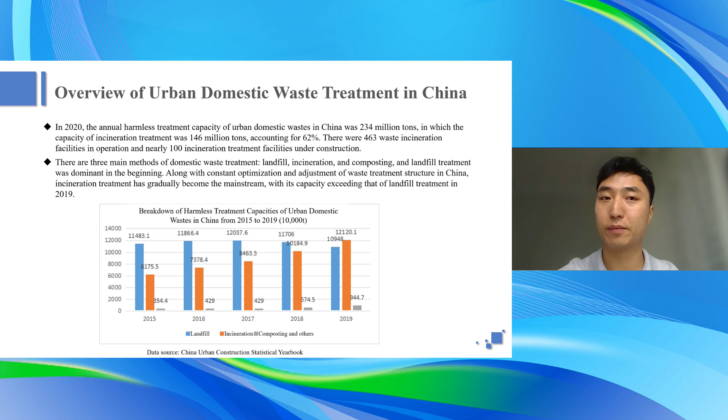So let's move over to another perspective, that is waste to energy. In 2020, the installed capacity had reached 15.33 million kilowatts. The annual on-grid electricity quantity exceeds 50 billion kilowatt hours.

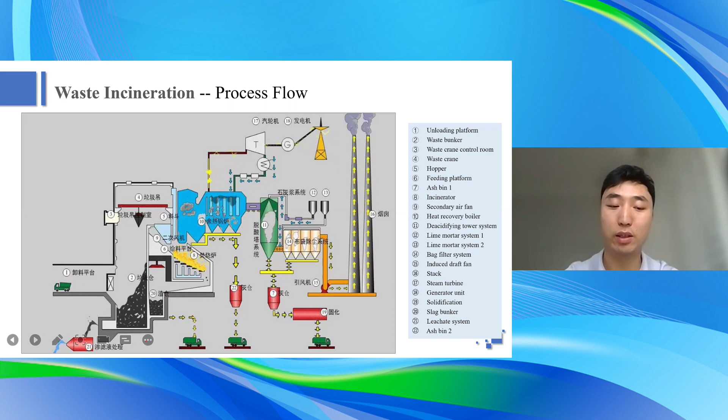The above mentioned are the introduction of the processes we have. Now we are going to move to key equipment of the incineration, covering the air distributor, the furnace separator, external heat exchanger, cooling chamber, low temperature superheater, air preheater, and also the flue gas treatment and water feeding system, deslagging system, etc.

What we want to focus on a lot is the furnace. There are 2 different schools of technology: the first is grate furnace, the other is FBP, fluidized bed. From the process, the grate furnace adopts movement of the grates, where waste is pushed downward through this movement. It passes through each area on the grates in succession until it is incinerated and discharged from the furnace.

FBP has been adopted for years. A large amount of quartz sand is added into the furnace, and hot air is blown in under the furnace to make the hot sand boil. Then the waste is fed into the boiling sand and burned with the hot sand.

The advantage of the grate furnace is that the technology is sophisticated with a small amount of fly ash, stable deslagging system, and simple control of combustion. The drawback is that it's more costly compared to FBP, with high maintenance cost and big volume. But now, with localization of this equipment, the price of the grate furnace has started to drop.

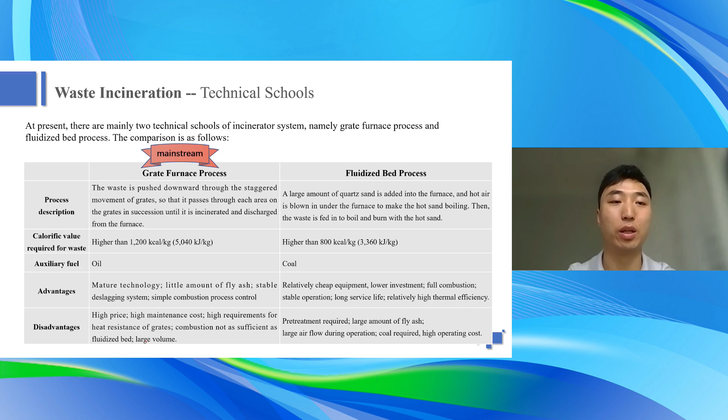The mainstream remains the grate furnace process, GFP, the absolute mainstream. In big, small, or medium-sized cities, we basically use the GFP, and the equipment is also becoming more and more localized.

And let's take Shanghai, the tier 1 city, as an example. There are 16 projects of incineration. All of them are based on the GFP, the Grate Furnace Process, 9 of which are imported. 7 out of 16 are domestically produced products.

Okay, let's move on to the investment cost and subsidies. In terms of the cost factors, investment in waste incineration is quite diversified, including the size of the investment, the land cost, the equipment, as well as the head counts, the human resources or labor cost.

For GFP, the investment cost per unit ranges from 0.3 to 1 million, while that of FBP is lower, 0.25 to 0.5 million RMB per ton. But as we mentioned, for example in Shanghai, the average investment of 16 projects is around 0.68 million RMB per ton.

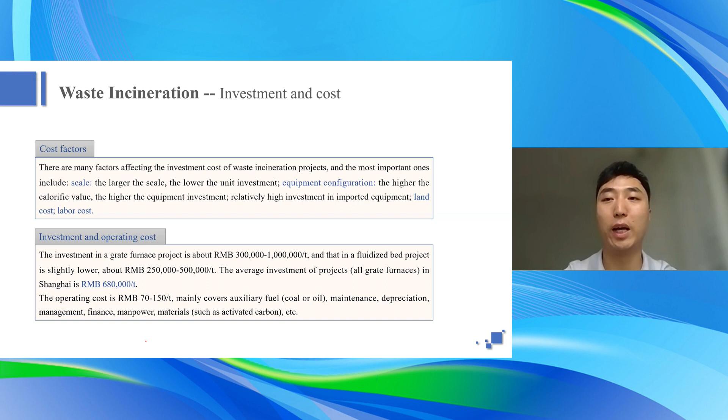The operating cost includes the auxiliary materials and maintenance, O&M, including human resources, labor, land cost. As we mentioned, it ranges from like 70 to even 150, but in Shanghai it's 50 to 90. The main source of income for incineration comes from the subsidy, as we mentioned. The other is the tariff.

The first is the waste treatment subsidy. It's closely related to the cost of incineration equipment adopted, as well as its boundary conditions. It varies quite a lot from project to project. Generally speaking, the subsidy may range from 30 RMB to even 200 RMB per ton. From the on-grid tariff, the tariff subsidy accounts for even 60 to 75% of the total income of the incineration project.

Yesterday, we mentioned a policy issued in 2012, a notice on improving the pricing policy for waste incineration power generation. It determines the waste to energy project using domestic waste as raw material. You need to remember the price was tentatively set at 280 kWh. The national unified benchmark is also 0.65 per kWh, not kWp.

In 2020, the subsidy policy was changed and clearly specified the condition for the so-called subsidy cutoff. The reasonable utilization across the life cycle is 82,500 hours or 15 years, and whichever is reached first will be adopted. Okay, the above is our overview on incineration. Now we need to move on to landfill.

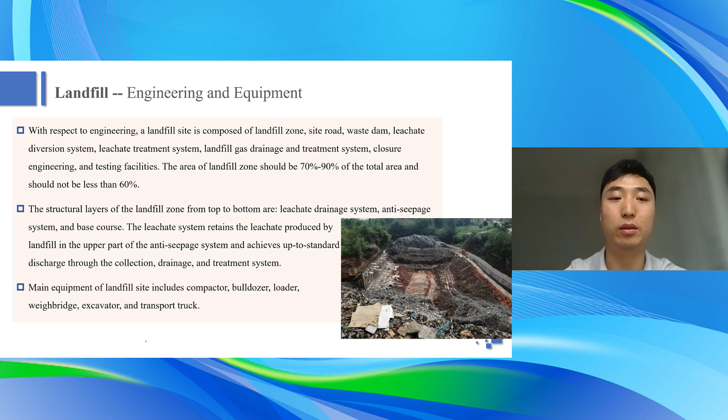From the project per se, it covers the area of the landfill. It covers the site, a waste dam, the leachate diversion system, treatment system, the gas drainage system, the closure engineering. It accounts for 70 to 90% of the total area. You can see the major system includes things like the compactor, bulldozer, loader, as well as other major equipment. And the leachate I just introduced is one of the major pollutants in landfill, and the seepage may cause great damage. Right now, we're using HDPE seepage control technology.

And now let's move to the third part, that is composting. First of all, what is composting? It is a technology that utilizes microbes to degrade or digest the organic matter in waste and therefore form a kind of substance similar to humus soil, which can be used as a fertilizer.

There are two ways: anaerobic composting and aerobic composting, with different kinds of bacteria or microbes used, for which you can see aerobic composting has been widely used due to its short period, high degree of harmless treatment, and good sanitary condition.

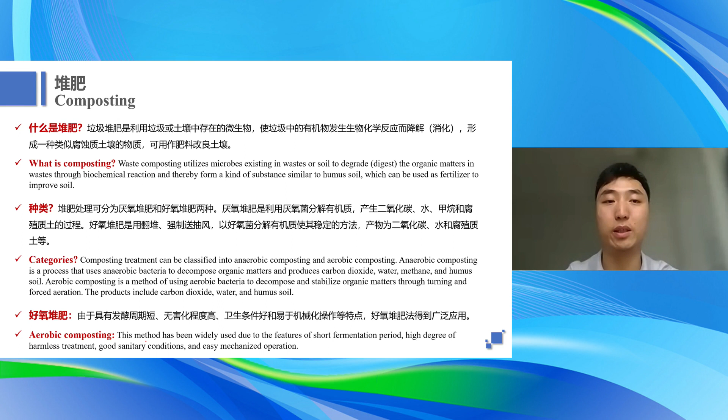And then let's move over to the anaerobic fermentation, also known as anaerobic digestion or biogas fermentation. It is a process where organic matters are catabolized by various microbes, and we can form combustible mixed gas such as methane, as well as the biogas slurry and residues. In recent years, with the advancement of waste classification, this has been extensively used in kitchen waste treatment.

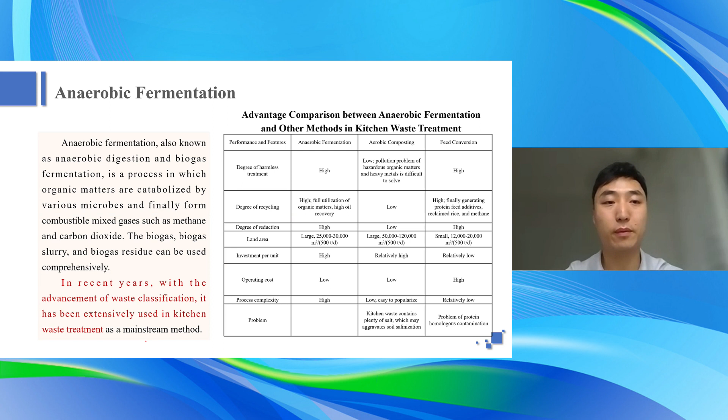So here is a comparison of various ways of treating kitchen waste, including the anaerobic fermentation, as well as the feed conversion. So the major two parts are anaerobic fermentation and aerobic composting, as feed conversion is rarely used. So you can see for the degree of harmless treatment, fermentation outperforms composting. For recycling, it is also high. For the land area, relatively similar. For investment per unit, you can see that the fermentation is higher than that of composting.

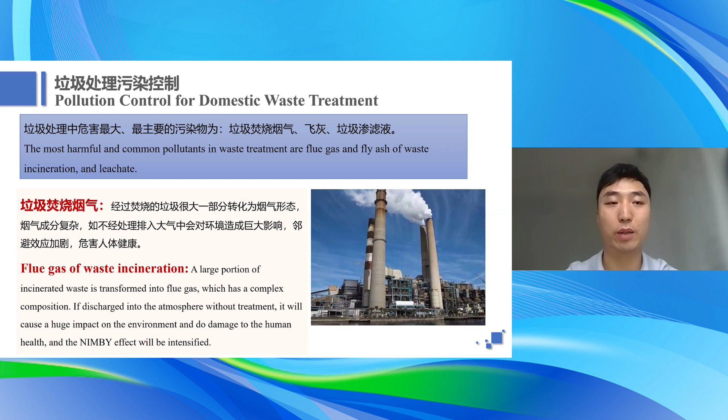And now let me move over to the pollutant control for domestic waste treatment. Here are the typical technologies and processes. As you know, the most harmful secondary pollutants are flue gas of waste incineration, as well as the leachate of landfill and the fly ash. So if you first check the flue gas, here are relevant pollutants, including the particulate matters, acid gases, organic chlorides, and heavy metals. These acidic gases are highly corrosive, and you know that the organic chlorides, like dioxins, are highly toxic chemicals, and heavy metal elements also directly harm human health. So you must purify this flue gas before you discharge it into the atmosphere.

As you can see, we have two parts, including the dust removal and the absorption purification. We have various processes like SCR denitrification, desulfurization, as well as activated carbon absorption, etc. So all of these are aimed to control these pollutants, and we can discharge while complying with all the standards. So I think this is a common concern for the public, dioxin. It is one of the key targets of policy measures. Yesterday, we talked about this standard several times: Standard for pollution control on the municipal solid waste incineration.

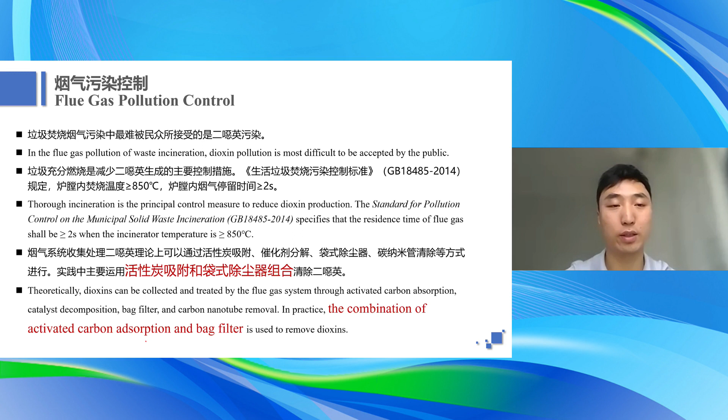You can see there is a very specific requirement of dioxin, and you can also see they have a particular requirement for the process that the incineration temperature should be higher than 850 degrees C, and the flue gas needs to stay more than 2 seconds. And that is the effective method to remove the dioxin in the flue gas. So yesterday we also mentioned the emission standards for different countries. You can see China is among the most stringent of all, 0.1.

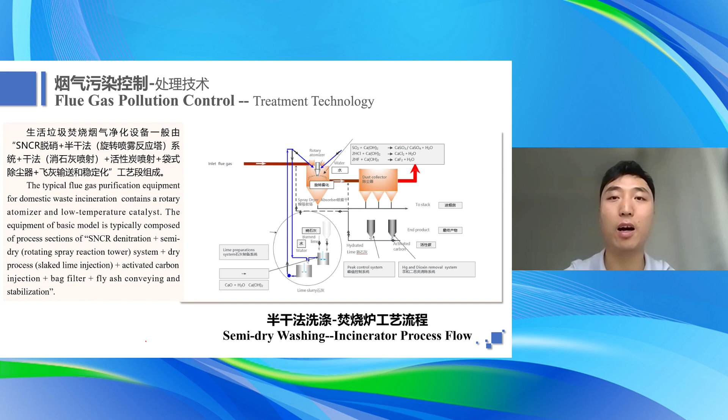And if you look at the technologies, let's take SNCR denitrification plus semi-dry plus dry process plus activated carbon and the bag filter. So this is just an example, and later we have suppliers who will give us a more detailed introduction of that. Other than the flue gas, we have the leachate as the other pollutant. For the leachate, it will be generated from incineration, landfill, as well as composting. It is also a complex pollutant with high concentration. Its major issue is the concentrated solution.

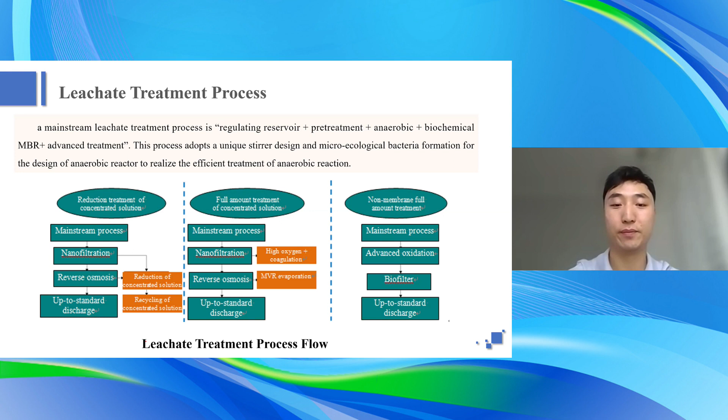Fly ash mainly comes from incinerators. It's also quite polluting. It has heavy metals as well as dioxin. The mainstream technology is solidification or stabilization, as well as cement kiln co-processing. So here I would like to give you a brief example of the leachate treatment process. This major technology includes regulating reservoir, pretreatment, anaerobic plus biochemical MBR plus advanced treatment. For the difficult part, we will have the anti-seepage as well as the MBR and others. So this will help us to do a simplified and comprehensive treatment. And for the details, I do believe the following suppliers will give you greater detail.

So that was my part on all these technologies of urban waste management. I covered many different technologies and processes, and due to limit of time, I was quite brief and concise. The details can be shared by the later suppliers. The four of them are leaders in the industry for urban waste management, and they will share with us their respective perspectives on flue gas, leachate, incineration, as well as fermentation.

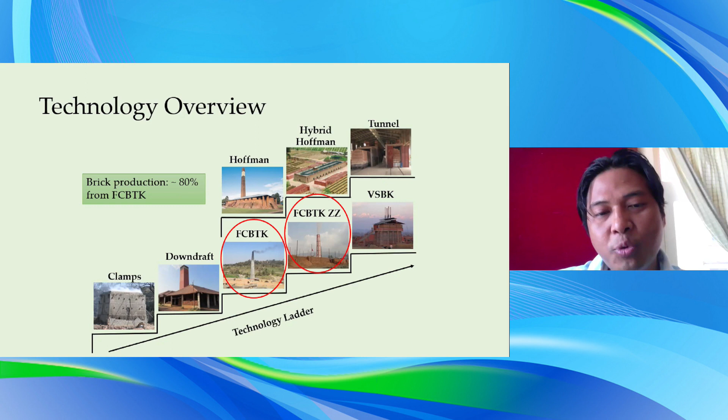In proportion, more than 80% of the kilns are FCBTK now. Another is the zigzag, FCBTK zigzag, about 10 to 15%. The rest are other kilns like VSBK, tunnel kilns, hybrid Hoffman kilns, clamp kilns. So today my presentation is more focused on FCBTK and zigzag, and what improvements we did in FCBTK zigzag.

In the context of Nepal, the mainstream technologies are FCBTK and zigzag. So what is the difference between FCBTK and zigzag? The basic, salient difference that a visitor who goes to the kiln sees is the structure of the FCBTK and zigzag kilns. In FCBTK, the kiln is a fixed chimney bull trench kiln.

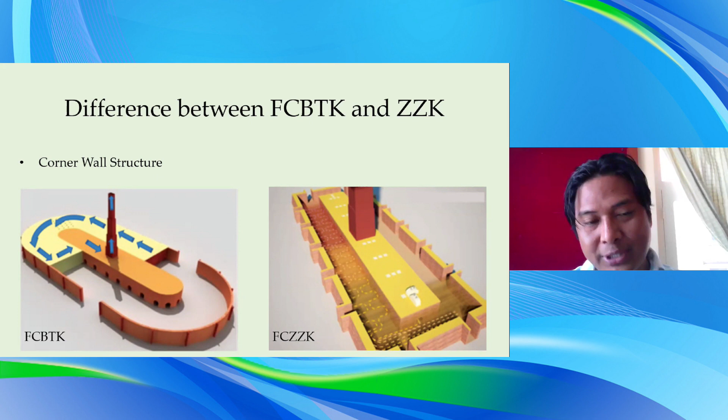It's the oval shape. The ends are oval shaped, whereas in FCBTK zigzag, you can see the ends of the kiln are square. So that is the basic difference which we can observe from outside. The other difference is the stacking pattern. You see the FCBTK straight line. We say it's straight line and zigzag.

The straight line is nothing but the stacking pattern of the green bricks. If you see in the slide on the left side, that's FCBTK. The stacking pattern is a very straight line, so the fire moves in a straight path. Whereas in the zigzag, the straight line is covered with the wall. That means when the fire moves in the straight line and the wall comes in between, the fire is diverted in a zigzag path. So that's why we call it zigzag kiln.

You can see clearly here is the fire movement. On the left side, it's FCBTK, which is a straight line. You see the fire movement is very straight. Whereas in the other there are lots of walls, we can say baffle walls, created in the stacking pattern itself, in the green brick itself, so that when the fire flows, it will collide with the wall and take the zigzag pattern. So that's why we call it that.

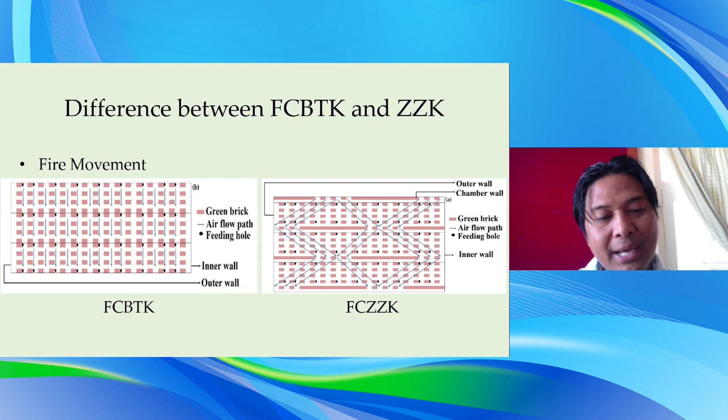So you can see that the length of the fire is quite less in FCBTK straight line, whereas in zigzag the length of the same fire becomes longer because of the created zigzag pattern. That is the salient difference of FCBTK and zigzag kiln. Another is the firing zone. In the operation, in straight line we have 2 or 3 fire feed hole lines only, whereas in the zigzag kiln we have at least 10 feed hole lines, more than 10, 12, 14. Whereas in the FCBTK, it's 2 or 3.

Another difference is the firing practice. In FCBTK, the feeding is intermittent. That means one fireman keeps on feeding for nearly 10-15 minutes, and then he takes a rest for 30 minutes. But in zigzag, it's continuous feeding. One person keeps on feeding in a continuous process. In FCBTK, it's double or even 3 men feeding at one time and taking rest for half an hour, whereas in FCBTK zigzag, one single person keeps on feeding continuously.

In FCBTK, they use big spoons to feed, so they accumulate lots of coal or fuel in the feed holes. Whereas in FCBTK zigzag, they have small feeding spoons, so a calculated small quantity of fuel in continuous feeding. They follow this pattern in zigzag, which makes it more fuel efficient and environmentally friendly. So those are the differences; then what are the similarities in FCBTK and zigzag?

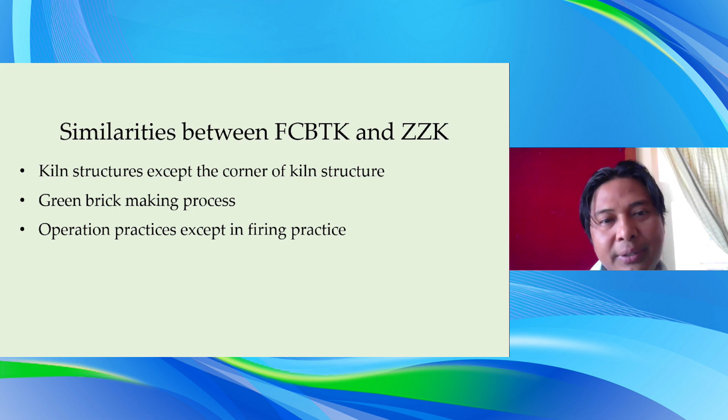Another context in Nepal is we had a huge earthquake in 2015, and we could see the damage at that time. We had about 900 to 1,000 brick kilns, and 350 kilns were damaged because of that big earthquake. We have 108 kilns in Kathmandu Valley; out of 108, 105 kilns were damaged. The estimated loss was 1.12 billion Nepali rupees, and the production loss was more than 40% due to this earthquake.

So what we decided is to have a kind of right design, which is earthquake resistant, which is energy efficient and lower emitting for the new building of the kiln itself. So we just started working with the team of engineers, brick entrepreneurs and the practitioners, so that we can collect all the information, all the data to improve the zigzag kiln itself, to improve the fixed chimney into zigzag.

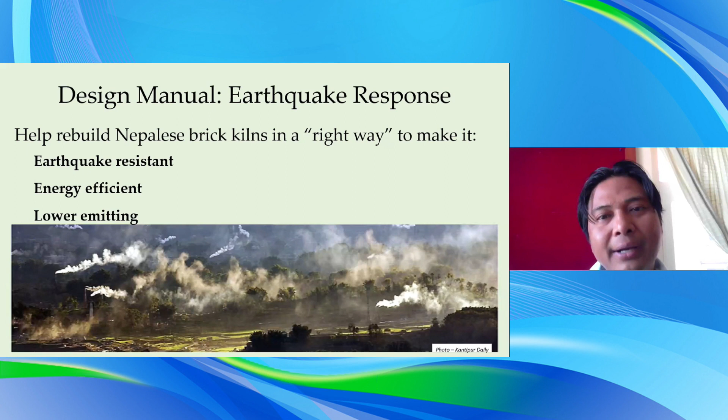So what are the improvements that we did? These are the improvements that we can see. We designed a new kiln chimney. We designed the outer wall. We calculated the heat loss from the wall, outer wall, wicket gate. That is the gate which is used to take in or out the green bricks and fired bricks. We also designed the flue duct, the size of the ducts, inlets and outlets. Everything we designed in a proper way.

So these are some pictures of the improvement that we did. The salient improvement is in the chimney. The chimney is newly built, newly designed, because beforehand there were big, huge chimneys for the FCBTK. It was about 110 feet or 130 feet, above 100 feet. It was huge and bulky, without any lateral structural element to withstand the lateral load due to the earthquake. So what we did is an RC, reinforced concrete frame chimney, or the metal chimney.

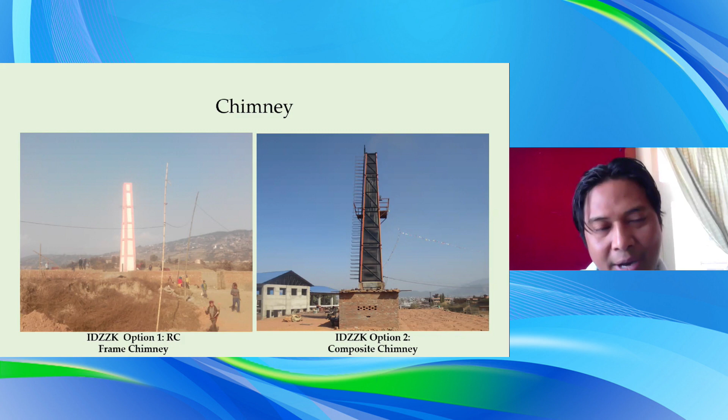We replaced all the chimneys with RC, or we give options, so that even if there is another earthquake, the damage due to the chimney will be less. We give three options. One is RC, a completely reinforced concrete chimney, or the iron frame chimney, or for someone using natural draft, who needs a very long chimney, more than 100 feet, they can also go for that one, but with the RC, earthquake resistant design. So this is a salient change in the design improvement.

And another change is in the wall itself. Initially, it was a very slim wall structure, about 18 inches or 2 feet. But we changed the new design to a very heavy and bulky wall with a cavity inside. It considered seismic loads, the lateral load, air leakage control, heat loss control. It controls the heat loss, it controls the leakage from inside or outside, and it is also earthquake safe. So that is another big change that we did in the improved kiln.

Other changes are the proper sizing and spacing of the flue inlets and outlets, and also the use of concrete pipe, concrete hume pipe as we say here in Nepal. We use the concrete pipe in the inlet and outlet of the kiln itself, which is very energy efficient, very fast to construct, and very easy to maintain.

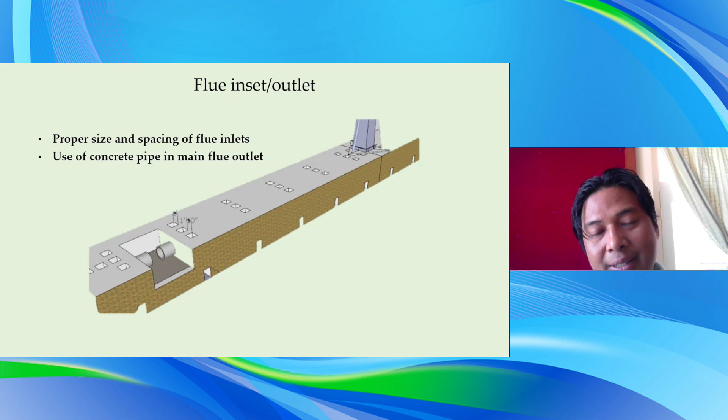We did the proper calculation of the flow of the flue gas, the quantity of the flue gas, then the velocity of the flue gas, so that we designed the appropriate sizing of the flue inlet pipes. And this is another change that we did in the kiln floor. Initially they had only a very thin flooring system, which had a huge amount of losses from the floor.

So what we did is we put about 1 foot thick sand on the floor, with aluminium foil at the center of the sand. And additionally we put brick soling layers, brick on flat and brick on edge on top. So the thickness of the soling is quite high, which reduces the heat loss to the ground. That is another change that we did in the improved kiln.

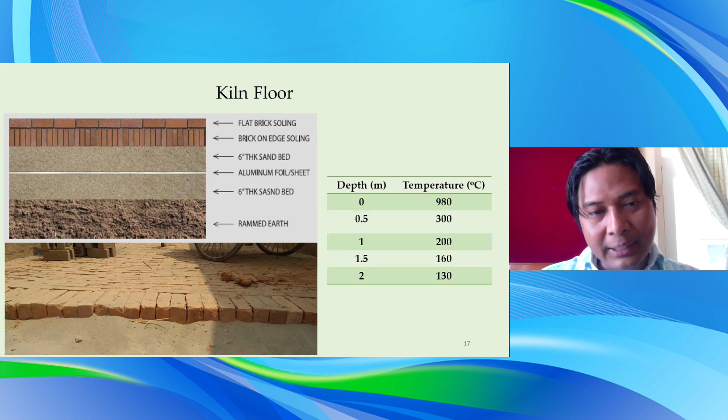Another design that we made is in the fan system. Initially, it was natural draft. Then when we went to induced draft or forced draft, we designed a proper mechanically engineered fan system, calculating all the required quantity of flue gas to be passed through the chimney.

We also introduced the VFD, variable frequency drive system, in the fan, so that if we need a higher RPM, revolutions per minute, we can increase it as per our need. So that is another change that we made after the big earthquake. And another improvement in the operation practice is using a higher amount of insulation at the top of the kiln.

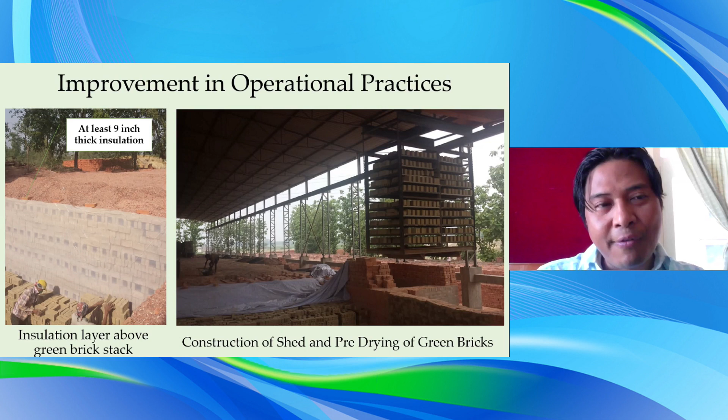Another improvement we recommend is to use shed and pre-dry green brick. That is the improvement in the practices. Beforehand, it was improvement only in the structures. Now it's improvement in the practice.

We also maintain the flue gas within 80 to 120 degrees Celsius. This improvement in firing practice gives us the maximum efficiency of the kiln. If the temperature is above 120 degrees, the hot gas which can be used to dry out the green bricks in the preheating zone is passed out instead. If it is below 80 degrees, the tendency of water vapor accumulation inside becomes high. So the most efficient design and operation is if the flue gas is maintained within 80 to 120 degrees.

So we did that, and we tried to maintain this temperature throughout the firing.

Another change we made is in the wicket gate, what we call Dwari, the opening where we take in the green brick or take out the fired brick. A huge quantity of loss comes from here too, because it's an open system. During firing, if it's not properly built, the leakage from this part is very heavy. With only an 18-inch thick wall, which is general practice in Nepal, the air leakage is 57% from that wall. Whereas with an improved wicket gate of 5 feet wall thickness, we can reduce air leakage to only 17%. That is one kind of improvement we made.

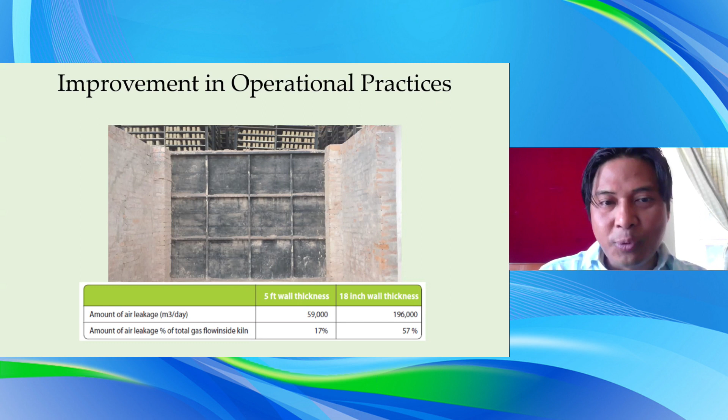So what are the benefits of the improvement? The first benefit is that the kiln structure is structurally safe and earthquake resistant. Since Nepal is very prone to earthquakes, with the tendency of a big earthquake in the future, and the kiln itself is very bulky with huge chimney, huge walls, huge structure, if it's not earthquake safe there are huge risks of human casualties if a similar earthquake happens in Nepal. The new improved design is earthquake resistant and structurally safe — the chimney, the walls, the internal walls, the systems are all safe. Structural safety is quite high in the new design.

Another benefit is energy efficiency. Since we're able to control lots of air leakage from this improved kiln, the efficiency is quite high — we experience about 30 to 40% fuel savings because of this improved zigzag kiln. Another salient benefit is environmental performance, which is quite good in the new improved design, including PM 2.5 emission reduction.

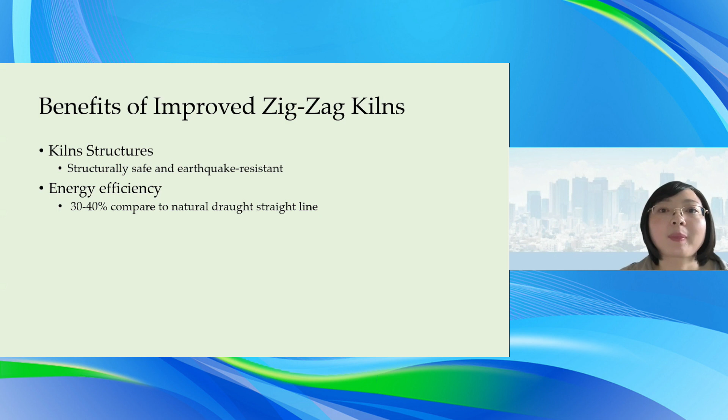Okay, can you see? Yes. Okay, so I was talking about the benefit of the zigzag kiln. The first benefit is the structurally safe and earthquake resistant design itself, which is very important in the context of Nepal, where there are lots of earthquakes going on. It's a very earthquake prone zone in South Asia. Another benefit is energy efficiency itself. We have 30 to 40% of energy fuel saving in the improved design. Another salient improvement...

Hi, Sanu. I think we are losing Sanu again.

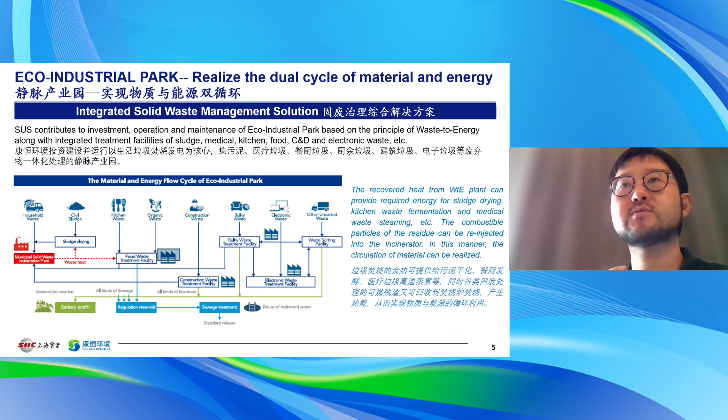And in terms of scale, most of the projects are pretty large. We had an internal calculation that the average capacity of our invested facilities is around 1,600 tons per day, which means most of the projects are big projects. Big projects will differ not only in technology, but also in business models and investment conditions.

But nowadays we are also starting to do some smaller projects, between 500 tons to 1,000 tons, because I think in most developing countries the scale per project would be around this size, as there are not many big cities in other developing countries.

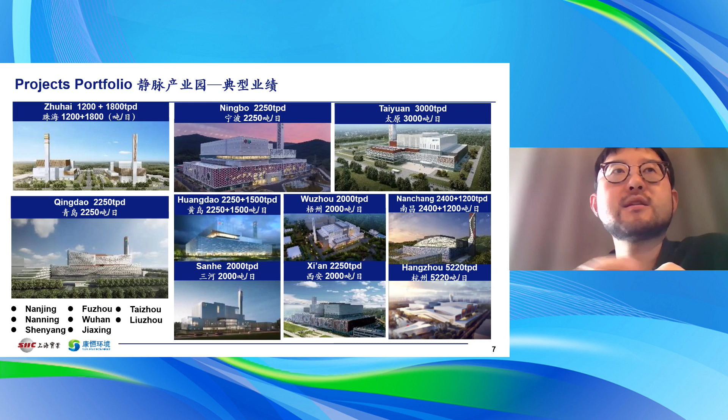But actually, we have most of our experience on huge projects. This is one typical case we invested in, in Ningbo City, close to Shanghai, which is also an eco-industrial park.

For the waste-to-energy facility itself, there are several important points I need to raise. This is the very first facility in China where we introduced the ultra-low emission flue gas treatment process technology, including SNCR, SCR, wet method, GGH, and some traditional methods, in order to achieve ultra-low flue gas emissions.

Besides the flue gas treatment technology, this is also the very first facility in China introducing industrialization of the architectural design. You can see from the picture that the Ningbo facility is pretty beautiful, with a honeycomb concept incorporated into the facility.

And of course, this is the first one which we are working with a French architecture firm, AIA, to develop this, to generate this idea. But the purpose, I think, is not only to make it beautiful. I think around 2014, 2016, the awareness of environmental protection became stronger and stronger in China.

So we also have encountered the NIMBY, not in my backyard, phenomenon. So how to deal with this properly is the key to helping this industry to grow in China. So what we think is how we can make a facility or an industrial park more eco-friendly and more adopted by the local community, and how to interact with the local community. That is the key of everything when we started to design.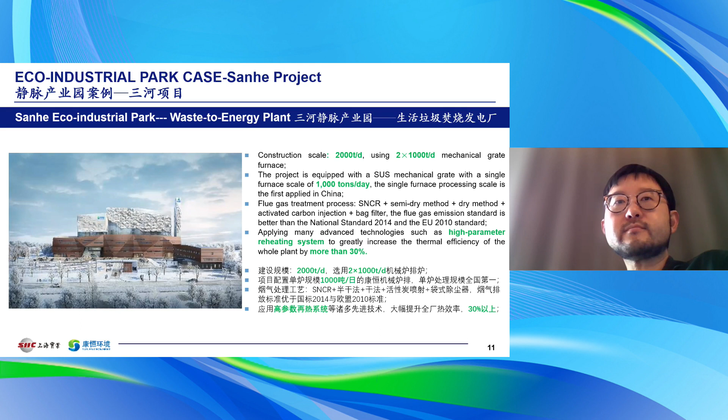Another technology, for instance, is in this facility, which was put into operation a year ago, our facility close to Beijing. This is the very first project in China to introduce the high parameter reheating system into a waste-to-energy project, which means these projects have a much higher thermal efficiency. Normally most waste-to-energy projects in China have an efficiency around 22, 23%, but this project has exceeded 30%. So it's a pretty good performance on efficiency utilization. And this is our facility in Nanchang in Jiangxi province.

Besides the projects we have invested in, I also want to add some points on our technology and engineering. As I have introduced, we started with the grate technology and incineration lines. So we have put a large R&D team on the development of technology for the combustion, the ACC system, and some related technologies to make the combustion more thorough and more efficient. But besides, we have also developed some side technologies like flue gas cleaning, leachate treatment, and also fly ash stabilization equipment and technology, and the materials as well.

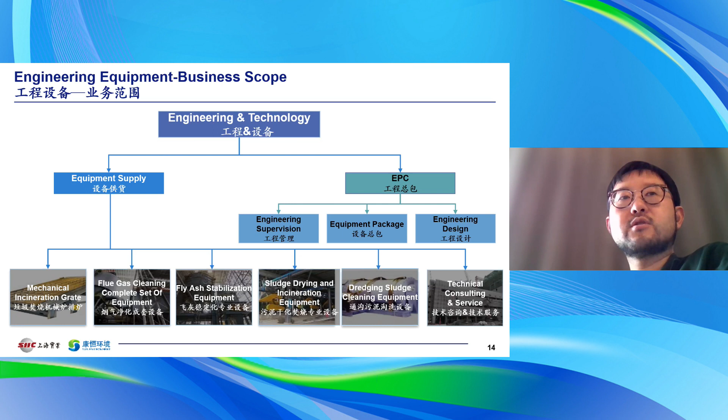We got some major progress and some prizes, and even some new, edgy technologies are under development. This is our grate, which is pretty much the same as Hitachi Zosen's technology, as we have the same source of the technology. These are the manufacturing bases we have in Jiangsu province and in Shanghai. And as I mentioned, we are also still an independent equipment provider in the industry. So far we are supplying more than 246 facilities in China with around 500 incineration lines. And we have highlighted some typical projects in very different environmental conditions.

Because China is pretty big geographically, we have some projects in very northern areas like Harbin. They have a very, very cold natural environment. So how we protect the temperature and keep the facility warm to make the waste burnable is the key of the technology. And on the opposite, we have a project in Sanya on Hainan Island. It's very humid, beside a seashore, so we have to face the high temperature and also humidity and the corrosion issues.

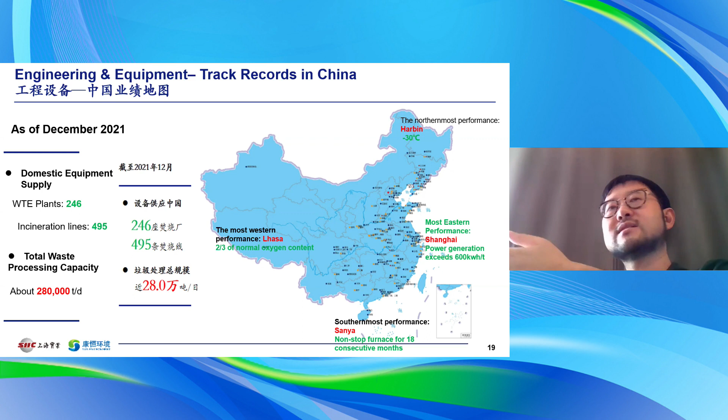And for instance, we have a project in Lhasa at high altitude, which I think is one of the highest projects in the world, which only has 2/3 of the normal oxygen density, so that is also another challenge. So what we have done is we have supplied projects to so many different conditions, which gives us a lot of track records and experience gained from those projects on how to deliver a technology to a very different environment.

Also, we have some other models, like O&M, where we operate and maintain the projects for other investors, because not all investors are technology experienced, so they need some help. So this is another business we are involved in.

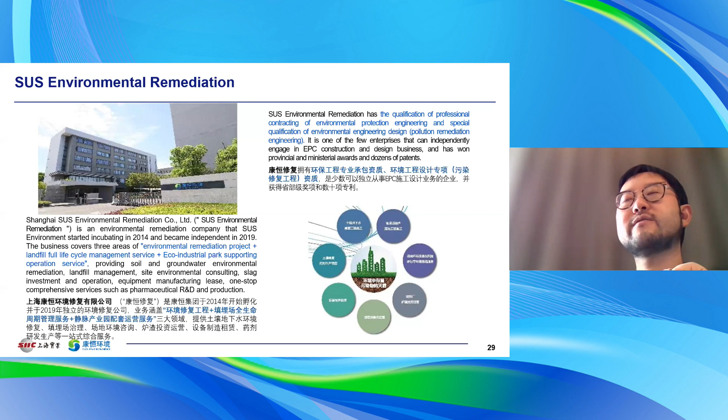Last but not least is a little introduction to our remediation business. This is the part which works alongside our waste-to-energy facilities. Right now, we are operating some landfills, which treat the bottom ash and fly ash, and we are also doing landfill remediation. It's mostly in China, but we got our very first project in Macau last year. Yeah, this is the brief introduction to SUS, and I think it's precisely 20 minutes.

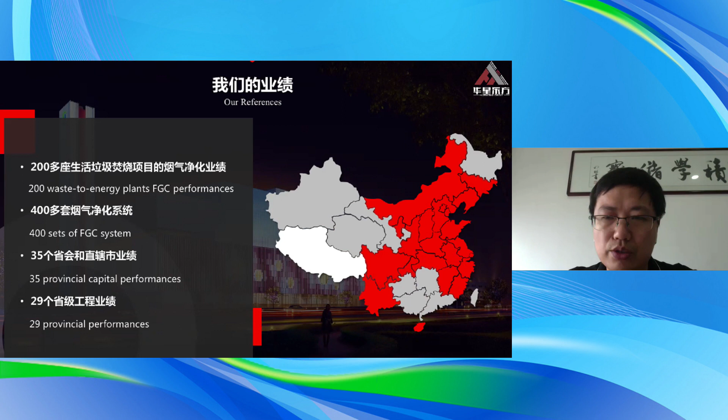So here you can see a simplified process flow for the streamlined flue gas cleaning. You can see the flue gas entered from the heat recovery furnace, and it will go to a rotary atomizer, in which we will remove the SOx, the acidification with the reaction, and then it will go to the dust collector. Prior to that, we will have a spray dryer injection, including lime and carbon, that will remove mercury and dioxin and other toxic chemicals.

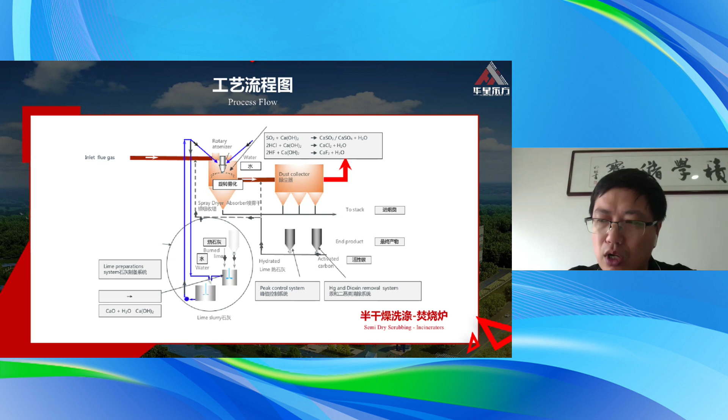After that, we can meet the emission standard of EU 2010 and China's national GB standard 2014.

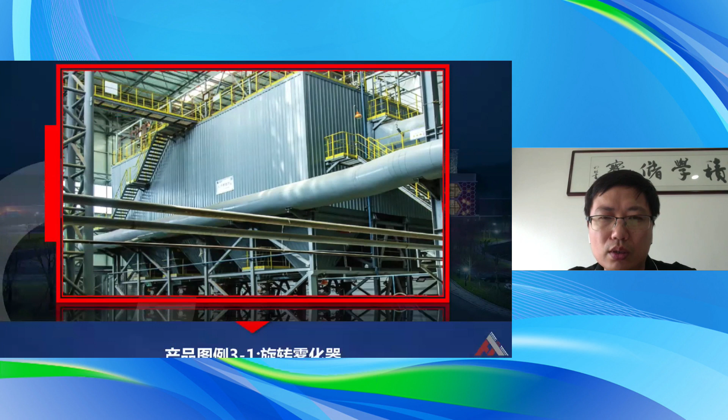This is the second product example, bag filter for the semi-dry reaction. So this is the container, the outside shell, and inside this container there will be several bags that will act as filters. And the third product here is the Rotary Atomizer.

We talk about the NOx. They have SNCR and SCR. SNCR is to inject ammonia solution or urea into the furnace, and that is how you remove the nitrogen in there. But for low temperature catalyst, you will be able to remove the NOx without the ammonia with a low temperature catalyst.

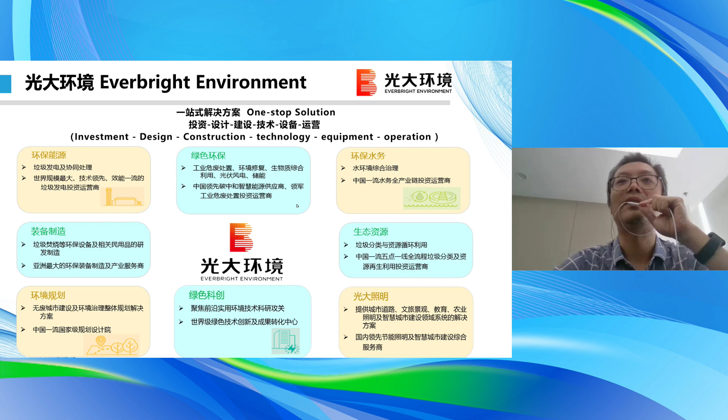Number 8 is our lighting business, Everbright Lighting. It targets the smart city, including street lighting, sightseeing lighting, and energy saving like LED. So all in all, we offer the one-stop solution, for incineration, biomass, hydro and wastewater sewage treatment. We cover from investment, as early as proposal design, construction, tech support, including the O&M after the project is finished.

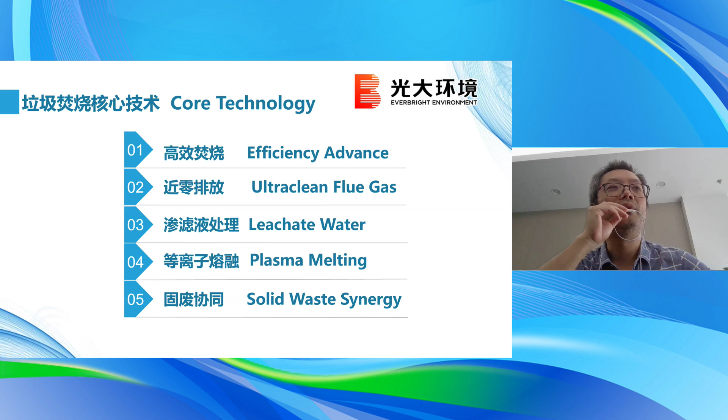And for that process, what are the challenges? The first is the thermal energy utilization rate is too low. For the traditional incineration facilities, the thermal efficiency is less than 22%. What it can realize in terms of the parameters on environmental protection is not that good. It may reach the EU 2010 standards, but as the standards trend more and more stringent, it may struggle to satisfy the requirements in the future.

So we have core technologies as follows. The first one is to improve the efficiency. The overall methodology is that we want to raise the steam parameters of the boiler. If it is middle temperature, middle pressure, the thermal efficiency is just 22% or less. In 2013 and 2015, we kept middle temperature but increased to sub-high pressure. So we reached a thermal efficiency of 25% with sub-high pressure.

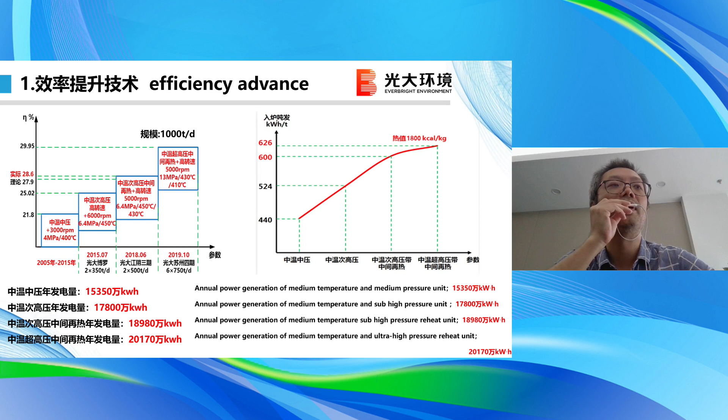And that is why we developed this ultra clean technology, or almost zero emission. After we go through the conventional flue gas cleaning, we have some extra devices. With this low temperature SCR catalyst, we can greatly reduce the NOx. With this wet reactor, we can also remove the acid gas in the flue gas. And with this combination of wet plus dry methods, we can also control the particles very well.

So we did a comparison with this ultra clean technology, again taking a 1,000-ton scale incinerator. Its heat value is 1,800 kcal/kg. And you can see, compared to conventional incinerators, emission reduction can be 7.6 tons of HCl per year, SOx 60.8 tons, NOx 228 tons per year. So you can see this is a great improvement for the emission.

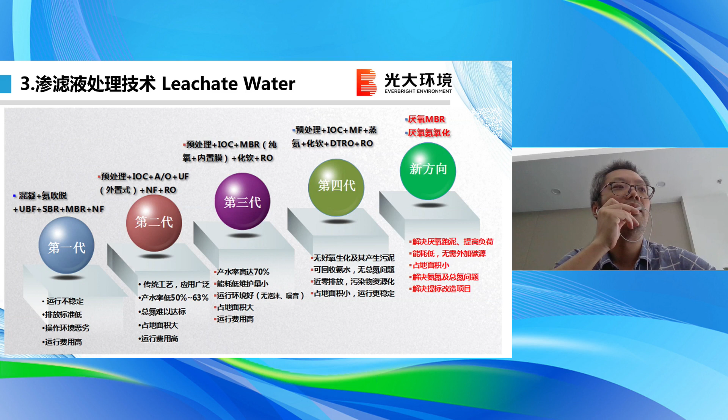Next slide, you can see the comparison of these 4 generations of technology. With the improvement of our technology, we have further reduced emission and have higher water recovery. Now at generation 4.0, we can have 85% of that. You can see the quality of the water has been improved, and we reduced the land coverage to a greater extent.

This slide shows our zero-emission whole recycling liquid treatment process. 85% of them can be reused in the cooling tower. For the concentrated solution, it will go to areas where they do not have very demanding water quality requirements.

So you can see the leachate first goes into the adjustment pool and goes to the anaerobic tank. This is our self-developed IOC tank. From that, it will go into the AO pond, and then it will be in the tank for softening.

With specific chemicals, we can soften the ions, and then it will go into filtration to remove all these ions, and then it will go to RO, reverse osmosis, and then DTRO for reconcentration, and eventually 85% of the water can be reused for cooling.

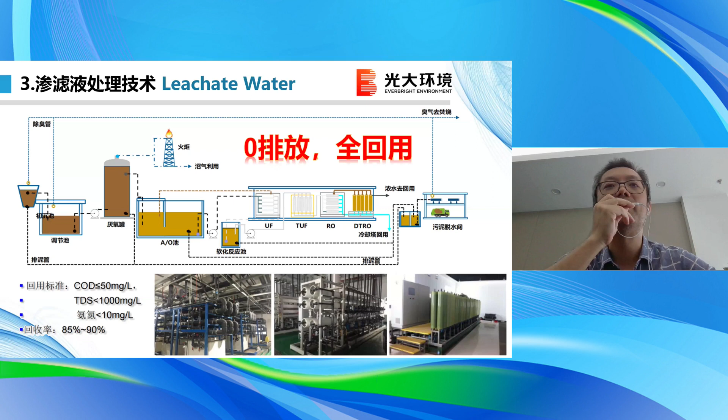Next slide. The next technology is plasma melting. We know that plasma is a kind of ionized charged gas, which is considered the 4th state of matter, and it has conductivity. It exists at very high temperature, 3,000 to 5,000 degrees C, and then the gas will be ionized.

With this technology, we aim to deal with 2 things. One is fly ash, the other is hazardous waste. The reason why we have the plasma technology for fly ash is that currently in China, the fly ash can go to landfill.

So we have similar consideration for plasma melting for hazardous waste. For the conventional way of dealing with hazardous waste, you will end up with certain slags that will be landfilled as hazardous waste. Is it possible for us to have a solution that solves the problem once and for all without further need of landfill?

Next one is for the solid waste synergy. The reason why we have such a technology is for every city, as long as there is need for dealing with household waste, there will be some other waste, including sludge, kitchen waste, and healthcare waste, etc.

So in the old days, we also had various organic waste disposal facilities, but in the end, we found from the technology perspective they were pretty mature, yet had limited capacity. The reason is when you build them independently, they have very high cost and a single source of income. For the government, it would be a great fiscal burden. For smaller scale separated organic waste disposal facilities, for a long time they existed in an awkward state - the technology is available, but the market is not yet ready.

So starting from 2016, we had the idea that maybe there's a way to reduce the cost. And we see the reason why these technologies or these small-scale projects are costly - that is because they need energy and resources, including steam and electricity, and that is very costly, and that drives up its OPEX.

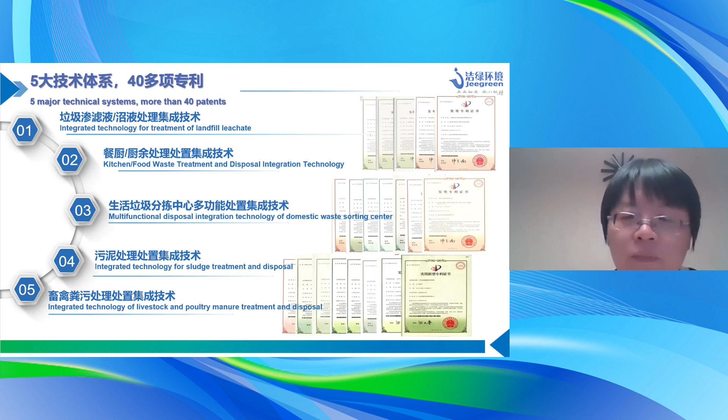I'm going to demonstrate our technology and products. We have forged 5 key technical know-hows, including integrated technologies, especially leachate evaporation and advanced oxidization technologies. We also have technologies listed for kitchen food waste treatment, disposal integration, and multifunctional ones. Thanks to the time limitation, I have to go very quickly.

The first is about leachate. For leachate and biogas slurry discharge, the pains in the industry are complicated composition, very high organic matter and ammonia nitrogen. Water quality and quantity may have fluctuations, making it difficult to treat. The concentrated solution produced by membrane treatment is difficult to further treat.

That's why we mention, in terms of core technology, CSTR, the anaerobic treatment. We work with Schumann, a German player, and Mixel from France. These international counterparts help us optimize our design of the anaerobic tank and agitator. We have addressed the floating slurry, etc. And the microbiological theory has been applied to the whole process of anaerobic fermentation to increase its efficiency and improve the COD removal rate. Effluent COD is 8,000 mg per liter, and the biogas production is 0.4 to 0.5 cubic meters per kg.

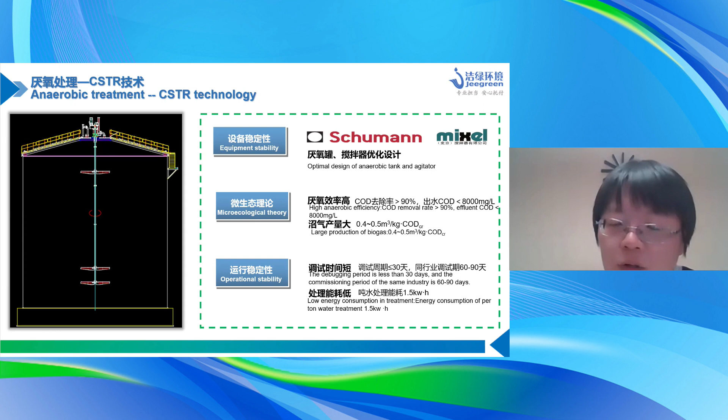Our O&M has been very reliable. We reduce the time of debugging, usually less than 30 days, below the industrial average. The energy consumption can be lowered to 1.5 kilowatt-hours per ton.

When we're talking about the treatment, the regulating tank, pre-treatment, anaerobic, and biochemical MBR is the master process. We have more stringent standards on emission, so you may need membrane evaporation. It can satisfy most emission standards, but relatively speaking, for landfill requirements, what we can do is as follows: we can use the main process, Fenton oxidization, BAF, and biofilter to reach emission standards. The Fenton oxidization makes sure the emission of the concentrated wastewater meets standards.

Now we have the pollution control standards for municipal solid waste landfills: pre-treatment plus MBR, advanced oxidization plus biological aeration filter. And for Class A standards for sewage, we can also have the relevant system.

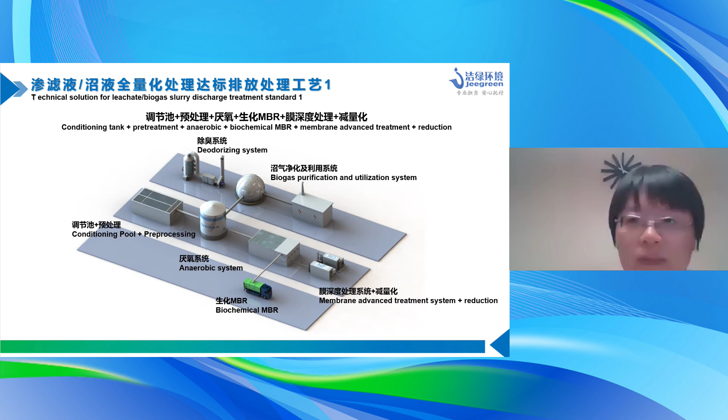This is the 3D model. So we have a conditioning tank for pre-treatment, the anaerobic and biochemical MBR looks like this. This is for the non-membrane ones, advanced oxidization, and also the biofilter, and also for sludge. And this is the total treatment, the reverse osmosis concentrate for evaporation, MVR evaporation unit in the middle. This technology is the mechanical vapor recompression.

Which is also boasted by Jeegreen with our own IPRs, intellectual property.

So for the efficient pre-treatment unit, we already have done a very important job, and we will have the desalination unit after that. So our efficiency of MBR is very high. The cleaning cycle has been extended from 7 days, which is the industry average, now to 60 days, which is 2 months. And the sludge can be used also for landfill or reuse or incineration.

That was in Shougang, that's Beijing Steel, 900 tons per day. We use the mesophilic anaerobic and MBR, NF plus RO. It was put in place in 2013, awarded as the national level demonstration project on energy consumption.

And these are some other typical cases. On the right side is also in Beijing, Fengtai: 1,200 cubic meters plus 250 concentrated liquid. You can see the ratio of concentrated liquid is 20 to 30% of the leachate. We believe anaerobic NF, RO, combined with other technologies will also be on our radar for further improvement.

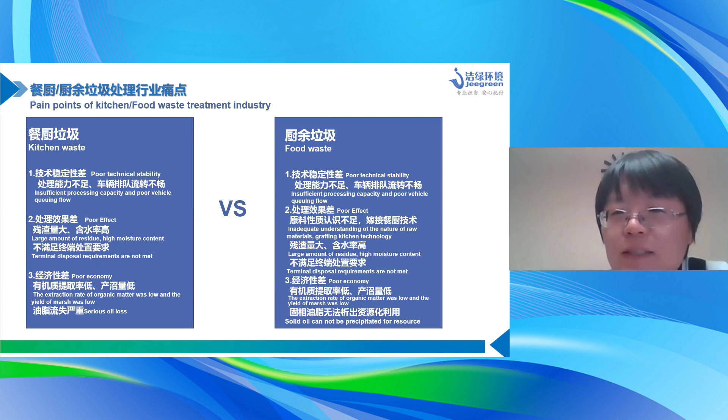And for the food waste on the right side, you can learn from the kitchen waste treatment, so there are many references we can take. Some of the pains, open questions on food waste pop up again.

So for these kinds of pains in the industry, we propose our own design concept. For kitchen waste, this is as follows: starting from pulping and then separation. For the pulping equipment, as shown here, we take some reference from the pulp, paper pulp, with secondary development, and we have the receiving hopper, the hydrocyclone pulping, screw extrusion, and collection at the broken bed, rubbing, washing, and separation.

So you can understand it is something similar to a washing machine. So we can separate the organic matters to better extract these matters for anaerobic fermentation. So this is our module. You can see there's a receiving unit. It goes to the hydrocyclone pulping unit, and then three-phase oil extraction to remove the oil and the slurry, and then the high concentration organic solution will go into the anaerobic unit.

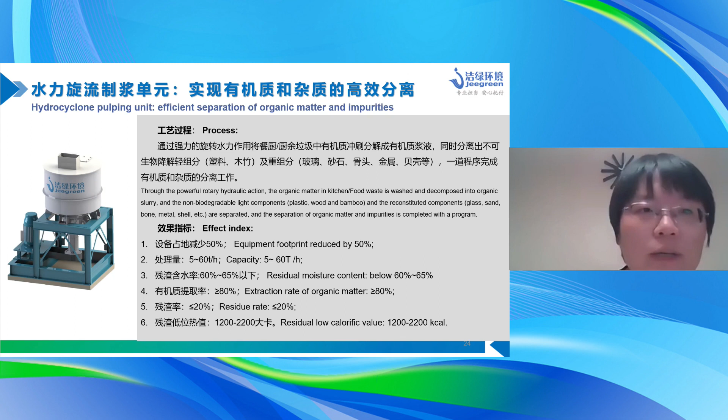For the biogas slurry treatment, it's similar to the leachate treatment as I previously described. So this is a hydrocyclone pulping unit. It can be flexible in its scale. It can deal with 5 to 60 tons per hour. The extraction rate of organic matter can be higher than 80%. Residual rate is less than 20%, and the calorific value is around 1200 kcal.

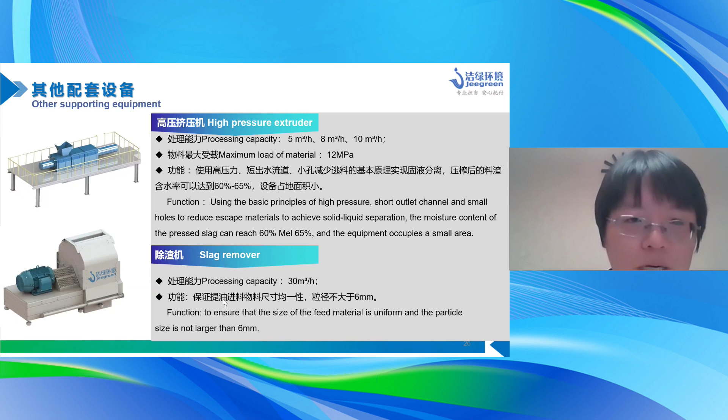This is a three-phase oil extraction, so it can have the sand removal, heating, and surface separation, and the efficiency of oil separation can be 97%. Here list the other supporting equipment: high pressure extruder to remove the moisture, and slag remover to ensure the size of the feed material is uniform.

After redesigning this kitchen waste technology, we can shorten the process chain by 50% and the queuing time by 70%. There's high purity in slurry and few inert substances, so biogas output can be 80 to 90 cubic meters per ton of waste and less than 10% of the residue. The moisture content is less than 65%. The oil per ton extraction has been improved by 2%.

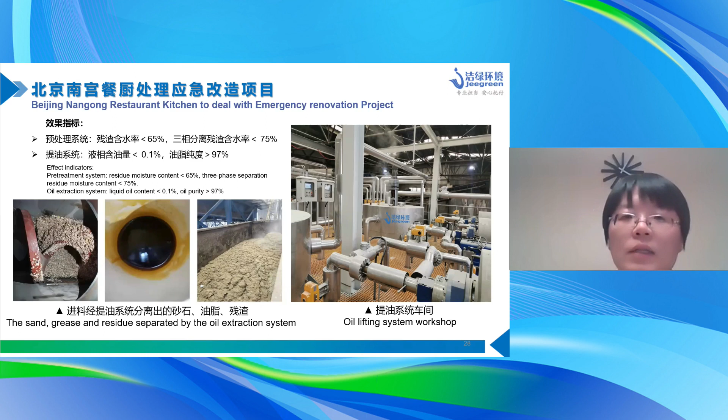So with this technology, we can have an in-depth analysis and come up with a design concept. We need to change the raw material into mature material, so it should be ripened before pulping. So it's like a thermal hydrolysis with high temperature and pressure, and then with hydrocyclone pulping, we can have constant concentration of organic matter. So this is our process.

Starting from receiving the feed, it will go to the thermal hydrolysis to extract the organic matters, and then it will go to the pulping after the thermal hydrolysis to remove the oil and the impurities, and then the rest go into the biogas unit, and there will be other purification and deodor units. So this is our independent technology with patent. This one is for thermal hydrolysis. With 100 to 150 degrees of steam, there can be rapid ripening.

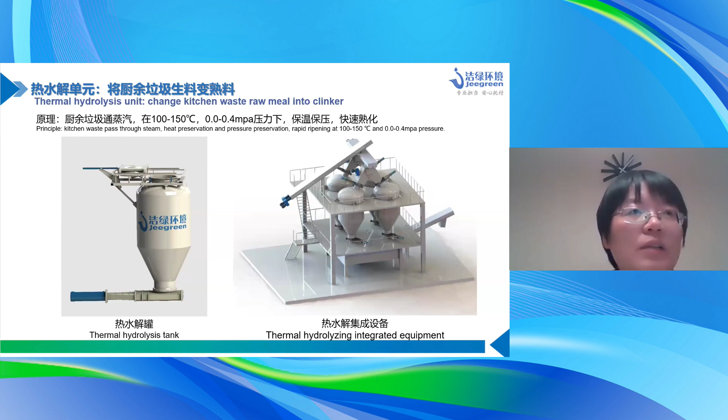It's quite similar to kitchen waste. With the thermal hydrolysis, we can have greater adaptability to the waste, and we're not picky with the raw material. As you can see from the previous ones, we do not need complicated pre-treatment, and we can have stable operation. We can shorten the process chain by 1/3, with much less residual content, less than 20%. And there is a high extraction rate of organic matter and yield of biogas.

With this thermal hydrolysis technology, we can very effectively remove all the organic matter. We break the cell walls, and they can have a great advantage for recycling. So we have this technology adapted to slurry and sewage. We have greater advantage. With the limit of time, I will not go into its details.

So we have another concept called thermal hydrolysis plus. So it can be used widely for organic waste, for food and kitchen waste, and slurry, as well as for animal dung or animal waste. So with different scale and investment, you can have different options. You can see for thermal hydrolysis generation 1.0, there is thermal hydrolysis plus extrusion. The project is in Likang.

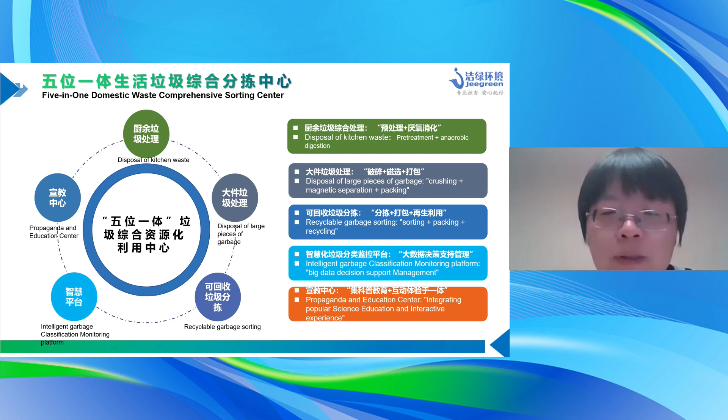With the assistance of big data, we can better manage the collection, transportation, and supervisors. We also have the education center integrate popular science education and interactive experience. This is a 5-in-1 sorting center, and it can be very good for the local government to popularize its waste classification. In Zhengzhou, we can have such a center account for 9 mu with a capacity of 150 tons of food waste, 10 tons of large piece, harmful hazardous waste temporary storage 2 tons per day.

This is another design for Changping County government. You can see we have the large piece sorting, the kitchen and recycle waste disposal, anaerobic zones, biogas utilization, and promotion platform and office area. So you can see the design looks like a garden instead of a waste treatment center.

We're also very enthusiastic in the innovative technologies. We know 2022 is the beginning year for China to promote rural revitalization and carbon neutralization. China is a large producer of agricultural waste, and it can also be transferred into high quality resources. So for the dealing of the straws, there is a national policy of no incineration. We prefer you transfer it to feed or base material.

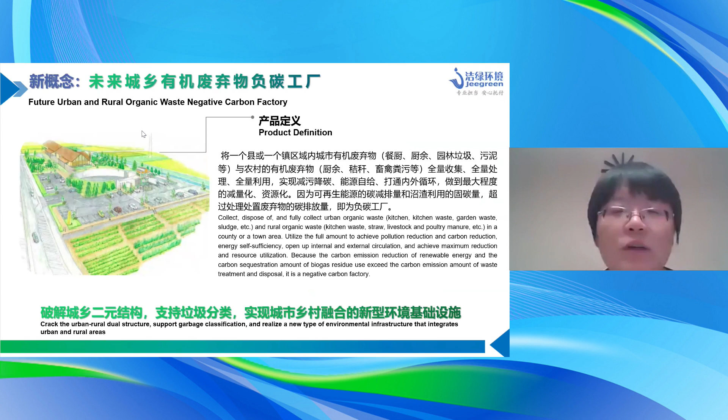For future corporation development, we were founded as EPC turnkey model, and then we have EPC plus operate, public-private partnership, BOT and BOO, and other models. Right now, some of the projects have already been operating for 30 years. We find there are certain areas that we can improve. So we also have this ROT model, reconstruction, operate, transfer, as well as EMC and CES. This is a new way of business model, so we can co-create value.

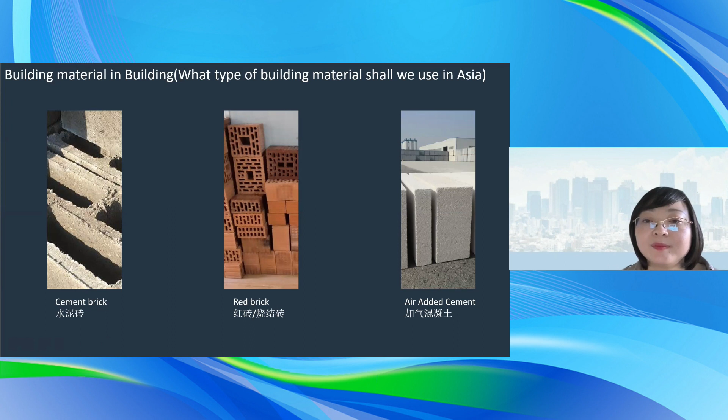There's a case that happened in 2015 in Iraq. Previously, red bricks were frequently used in Iraq as a traditional building material. But in 2015, they chose cement bricks as a new type of building material. You know, Iraq actually is a very hot place.

If you want to travel to Iraq, I have one small tip for you. When you open the water tap, try to keep the tap open for 1 minute. Otherwise, the hot water will burn your skin, which I mention to say actually Iraq is a very hot place.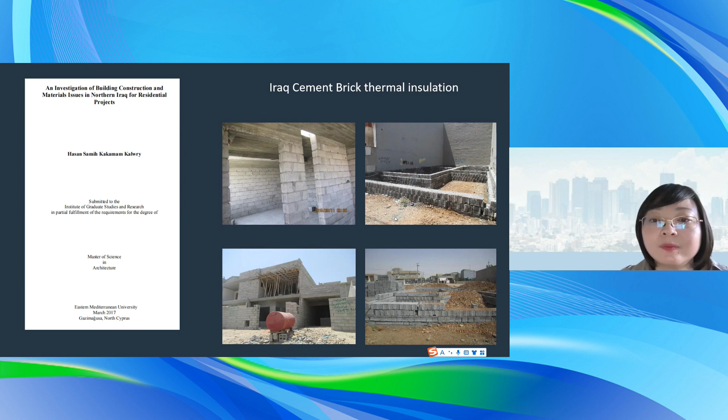But in 2015, with the Iraqi rebuild program, they gave a lot to cement factories to supply the building materials, which have very bad insulation. In 2017, an investigation, as shown on the left part of the screen, of the building material issue in North Iraq for residential projects produced a report, and there were so many problems with the cement bricks. The main problem actually was that cement bricks are not suitable for the thermal insulation needed in Iraq's extreme hot weather. Or we can say for our Asian countries, cement bricks are also not that suitable for extreme hot or cold weather.

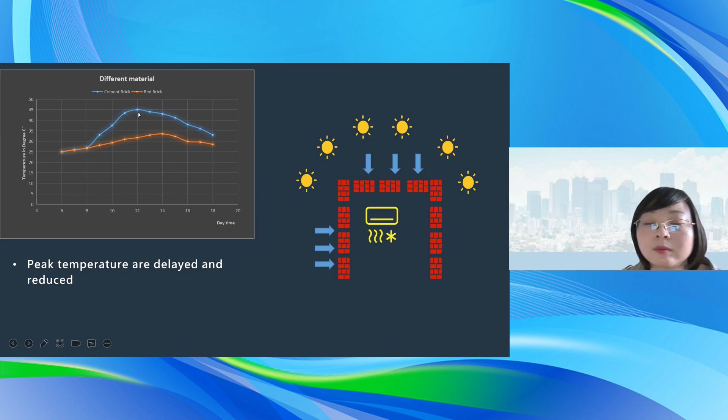If you can see the picture here, as I drew for the red bricks, from 4 o'clock in the morning to 18 o'clock in the evening, from sunrise to sunset, we really need very good insulation in the building material. The red curve represents the red bricks, while the blue curve represents the cement bricks. The peak temperature for the cement bricks is around 45 degrees C, reached at 12 o'clock noon. With red bricks, the peak temperature is delayed and reduced to only 33 to 34 degrees.

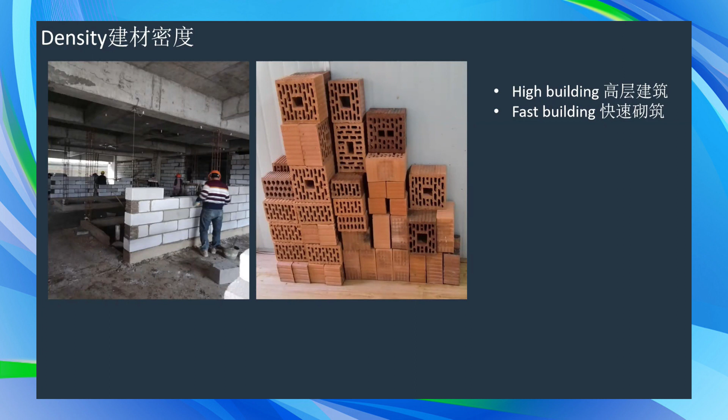Another index we want to discuss for Asian building material is density. The lighter the building material, the easier it is for us to build high and build faster. Even a little worker can carry AAC for construction. Actually, AAC is the winner for this index. So comes the question: why did the Iraqi gentlemen in 2015 turn to cement bricks? Because cement bricks are really cheap in terms of initial investment based on the same capacity. You may see the AAC and red brick technology cost almost 10 times more than cement bricks.

Raw material. When we discuss building material, we consume a lot of raw materials for making them. So for AAC and cement bricks, we have a C in the English name. The C actually represents cement. To be honest, excluding China, Asian countries have some issues with cement production. Number one, the price is almost double that in China. And secondly, cement as a raw material is too expensive and heavily polluting.

When we discuss pollution from making building materials, we cannot only compare the product itself; we also have to compare based on the principle of the whole life cycle or whole process cycle. So if you are using cement to make a brick, you also have to consider the pollution and the energy consumption when making the cement.

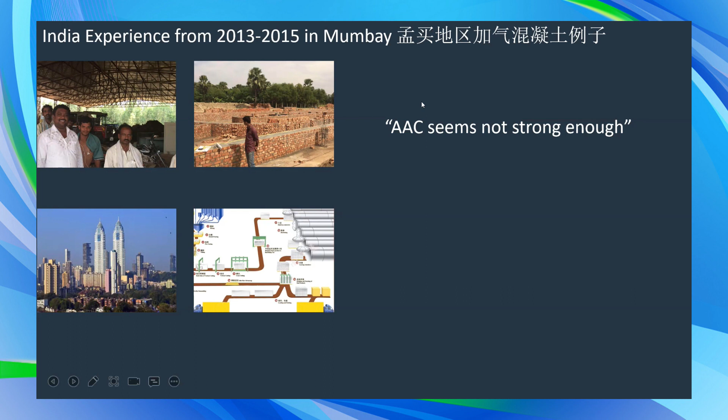Also, there's one kind of raw material for red bricks called dredging sand. Every year we take this kind of sand out of the river, using this type of boat. It is sand, but the particles of this type of sand are too fine. You cannot use it for other building materials. Only red bricks can use it.

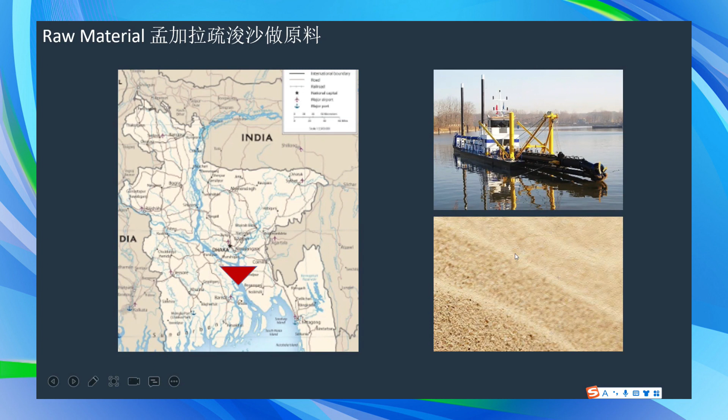And if you don't cover it, on a windy day the wind will blow it everywhere, and every year you have to redo this job again and again. And even nowadays in China, the government encourages us to use more water treatment plant waste, as so many speakers today introduced. They are more professional on this type of topic.

For moisture control, we can see the red bricks under the microscope. You can see a lot of particles. These particles can absorb water. We feel very comfortable, as if living near a lake, in red brick buildings. When the weather is too dry, the water will be released from the red bricks, and when the weather is too humid, the water will be stored.

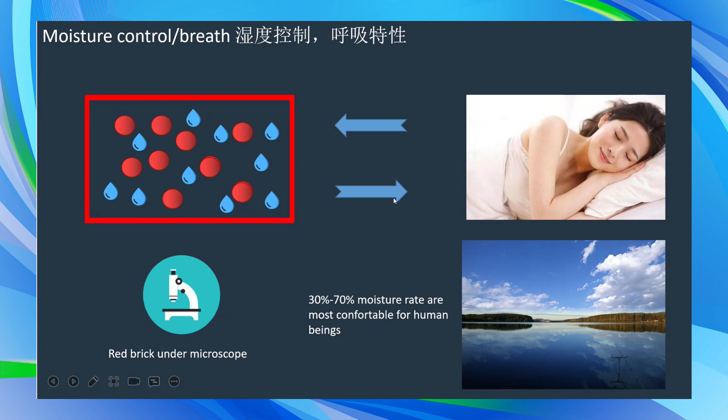So we may have a conclusion for this part. For all Asian countries, what shall be the best building material? Red bricks seem the winner, the most successful building material across Asia.

So based on this conclusion, from 2011 to now, with ADB support, we have tried to help 100 projects using clean technology for FCK, HHK, and tunnel kilns. And here's some machinery. We also try to give management help to developing countries, since they have some management issues.

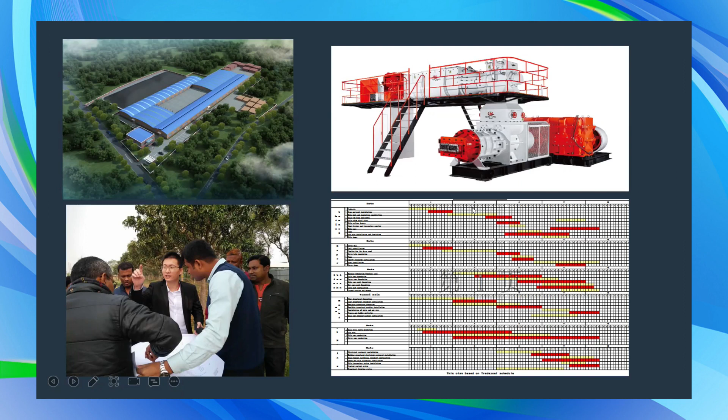The second section. For the second section, I'd like to discuss red bricks and their challenges. If we want to develop red bricks, of course we have some issues. In Asia, we follow this history of kiln development. The first generation was the shuttle kiln, then it developed to zigzag, then to FCK and HHK, and then the tunnel kiln, which China and Europe acknowledge as the most advanced technology.

Again, I want to compare several things for zigzag, FCK, HHK, and tunnel kilns across Asia. The first thing that always comes to mind is energy efficiency. Five years ago, one gentleman, the owner of a zigzag kiln, came to me. He said, Frank, how much coal does one tunnel kiln consume for 100,000 pieces per day with 5,500 kilocalorie per kg coal?

You always tell me the tunnel kiln is the best, most energy saving technology. So how much coal does it consume per day? I told him the answer is 13 tons. And then he said, that's weird, Frank. My zigzag only consumes 11 tons. Why does your advanced technology consume even more energy than mine?

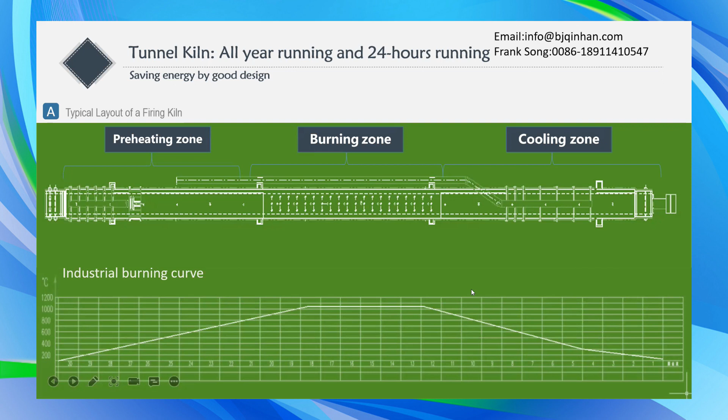Just 1 year ago, China CCCC came to me and said they want to buy some bricks in Bangladesh. They wanted to test different suppliers' bricks. This is the machine we used at that time to test the strength of the bricks from zigzag, FCK, HHK, and tunnel kiln. On the right side, you can see the bearing pressure. The bricks from zigzag and FCK were only 2 to 8 MPa, million Pascal.

So we turned to 20 to 30 suppliers at that time, but only the tunnel kiln company got this order at last, because CCCC gave a standard: at least 10 MPa as a building standard. Not to mention there's another index called the freeze-thaw resistance coefficient, 抗冻融系数. This is useful for Mongolia and other cold countries in Asia.

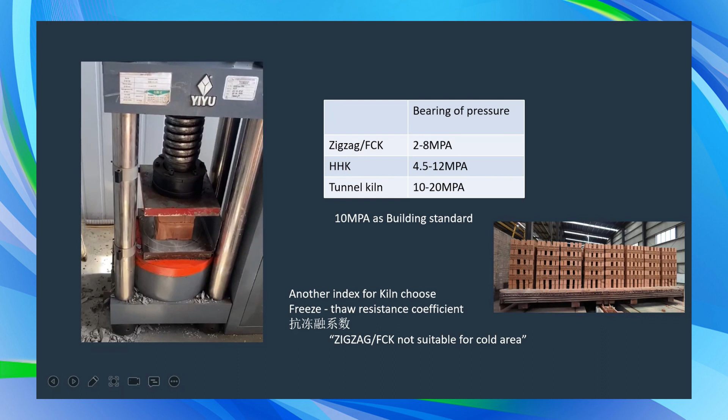But to be honest, the FCK or zigzag bricks are okay for this type of index because we are not really suffering from the cold in countries like Nepal or Bangladesh or India. Basically, I'm not biased toward any type of technology like HHK or tunnel kiln or Hoffman kiln. I embrace all the technology myself. I even developed this zigzag for the Middle East.

For example, for coal, some countries in Asia don't have coal themselves. You have to import from India or Indonesia. And you have to save energy, you have to save the running cost for the brick factories. The coal price has been hiking all the time in the past 5 years. Now it's almost double. And the CNG, LNG price is sometimes also not that cheap. Then people try to develop biomass.

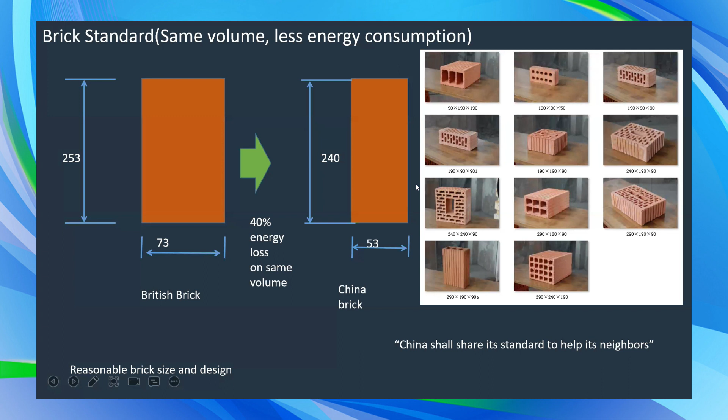These are some pictures we made for the Chinese industries and also the layout.

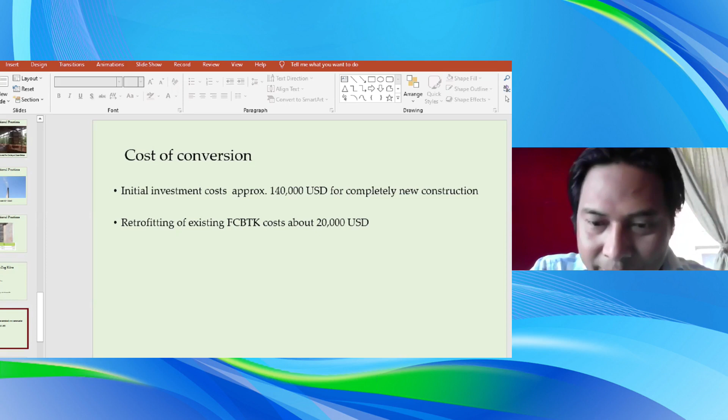So regarding the questions, if you see the last slide here, we can see what is the main conversion cost. I was talking about the fixed chimney zigzag kiln. So initial investment to build a new improved zigzag kiln is about 140,000 USD for establishment of a new kiln. Whereas for conversion, if some entrepreneur has a fixed chimney BTK, FCBTK, and wants to convert to the improved kiln, he can spend about 20,000 USD and get the new improved kind of kiln.

So I think this is the most cost-effective and cost-efficient technology conversion kiln. In the existing condition, he has the walls here, he can just improve the wall thickness, cut the edge of the kiln, and convert it into a zigzag kiln. He can also use the same chimney with some improvement, and add a fan and other things. So only adding about 20 to 25,000 USD can convert his FCBTK to an improved zigzag kiln. To build a new one costs about 140,000 USD in the context of Nepal, whereas just the improvement is very cost efficient.

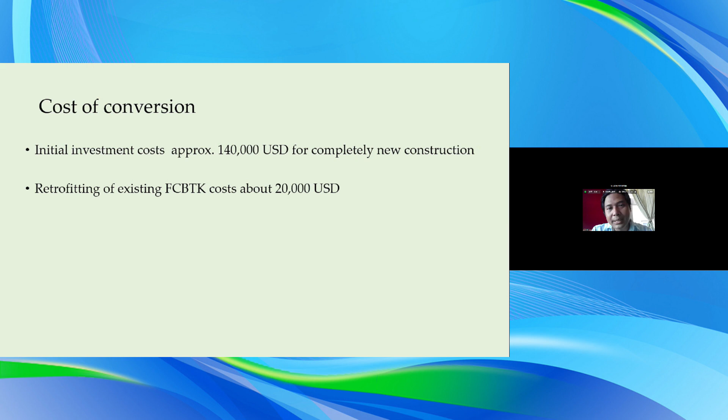In my opinion, the most cost efficient and cost effective technology to convert in an energy efficient way, at low cost, is to convert FCBTK to improved zigzag kiln. If we talk about tunnel kiln and Hoffman kiln, I agree it's more efficient in terms of emission and more worker friendly, with lots of benefits, very high cost and effective. Still, in my opinion, the improved zigzag kiln is the better option.

The improved zigzag kiln is very cost effective compared with the existing FCBTK, with benefits of saving up to 30 to 40% of fuel. We measured the emissions comparing FCBTK with improved zigzag kiln and found we can cut down about 20-25% of PM 2.5 and SPMs, and black carbon is also reduced.

I also put the link of the research conducted by ICIMOD in Nepal in the chat box, so you can go through it. That is my last slide, thank you.

Any other questions? Thank you, Sanu. A very perfect end for this breakout session. I think we covered all the presentations, and we also had very active discussion through chatting in the chat room. Very good slides, very good presentations.